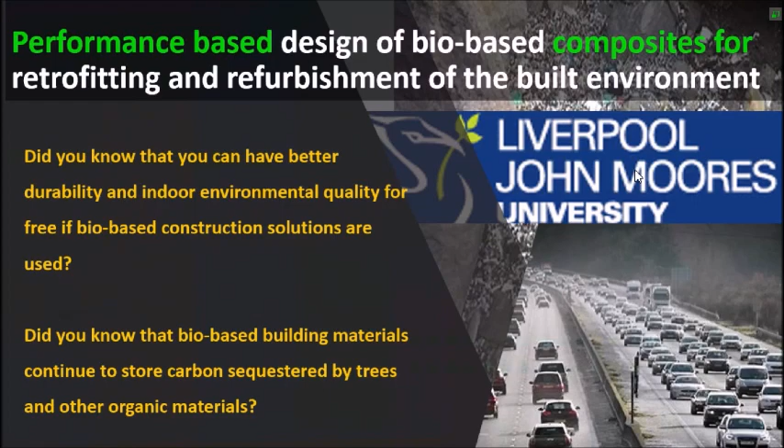Did you know that you can have better durability and indoor environmental quality for free if bio-based construction solutions are used? Did you know also that bio-based building materials continue to store carbon sequestered by trees and other organic materials? This is what we do at the Built Environment and Sustainable Technology Research Institute.

We develop and optimize bio-based solutions to increase buildings' energy efficiency and durability, and to optimize hygrothermal behavior using performance-based design methods, incorporating industrial byproducts, life cycle assessment, and life cycle cost.

We develop sensor technology for structural health monitoring, for new and existing construction solutions, and sensor optimization for human well-being. Finally, we test all these products in real-scale buildings to monitor behavior and optimize building materials.

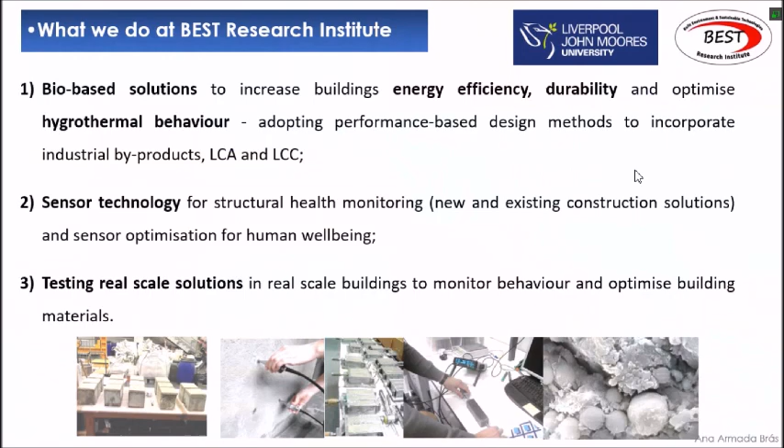Our team is bonded by a unique goal: to develop novel bio-based multifunctional systems that provide a solution for significant energy savings, structural durability, as well as indoor well-being and comfort.

We design bio-based materials by tackling moisture buffering while ensuring the right chemical and mechanical properties to produce smart behavior that in the future will feed into the building management system.

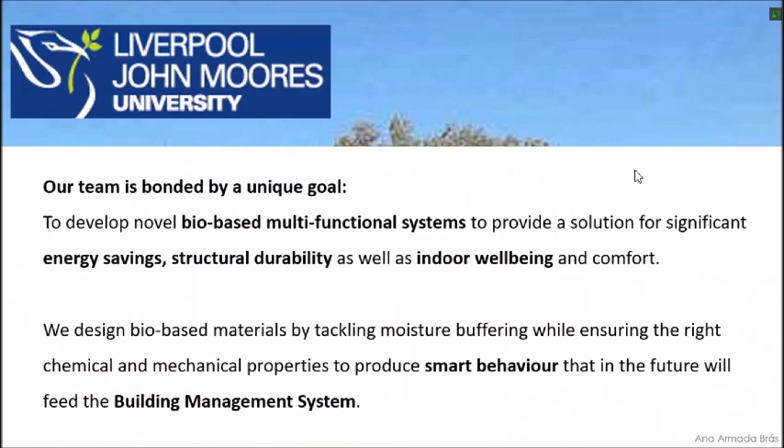These are some examples of the products we develop at our labs: internal thermal insulation composite systems, earth-based bioproducts, cork-based bioproducts, and self-healing bioconcretes.

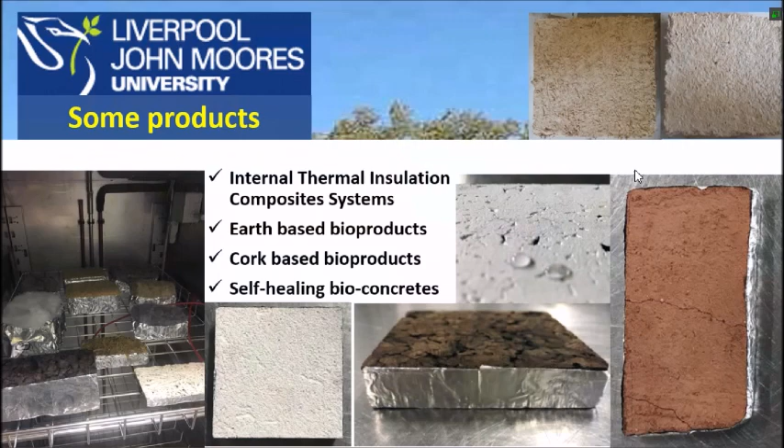We develop these at a laboratory scale, and then, of course, we need to test those new materials at a full scale to understand what is the real behavior.

Fortunately, we have 3 full-scale eco-houses on our campus, designed to standards from the 1920s, from the 1970s, and present day, fully equipped so that you can monitor using sensor technology, not only to check the behavior of those materials, but also different indoor environmental conditions.

We use this to test and develop new green technologies and new building methods, which is very suitable for industry, because if industry wants to develop a new product, they always want to test its real performance. This is why we always work together and develop industry collaborations, because we have the opportunity to carry out real-scale tests.

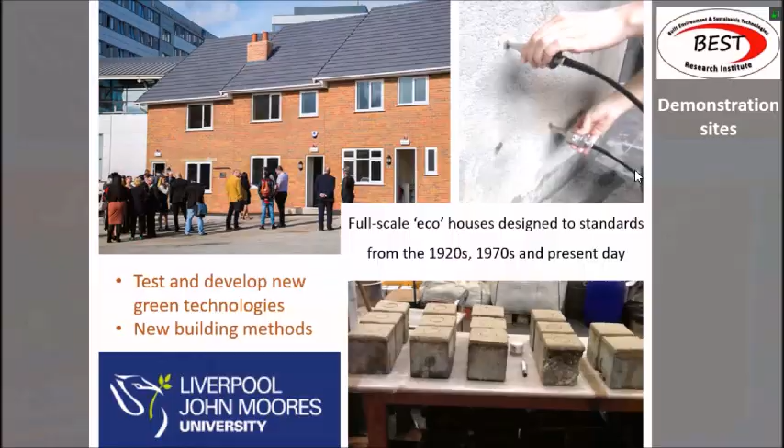These are some ongoing research projects at Liverpool John Moores University: optimization of bio-based building materials using image analysis methods, and indoor air quality regulation through the usage of eco-efficient mortars, a project in partnership with Nova University of Lisbon in Portugal.

This second project is about the development of bio-based materials that can be used as a refurbishment solution applied indoors, so it can absorb the excess of volatile organic compounds.

The third one is optimization of bio-based materials using real-time monitoring of moisture buffering behavior, and biocrete, a self-healing bioconcrete with protection of reinforcement against corrosion. Finally, development of novel multifunctional bio-based insulation systems with smart materials for building refurbishment.

So what we are doing, we are also developing bio-based solutions that can have the ability to absorb the excess of moisture indoor. I know that you don't have this problem here, but in Europe, it is very often during the winter that we have in our houses more or less 80% relative humidity, which is a higher level.

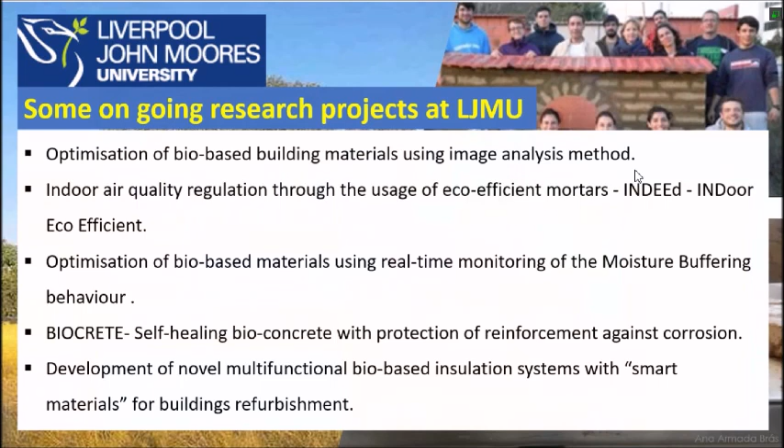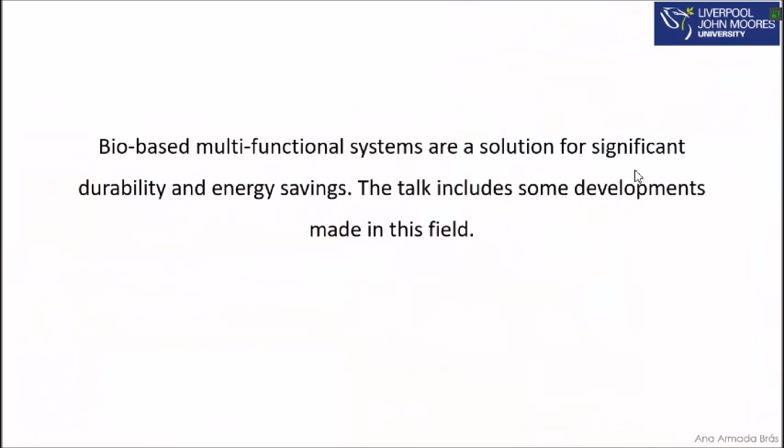So bio-based multifunctional systems are a solution for significant durability and energy savings, and the talk includes some developments made in this field.

Did you know that in Europe, repair and maintenance of existing structures cost around 40 to 60% of the construction budget, where reinforced concrete represents a major relevance? Only in the UK, 550 million pounds are spent per year on maintenance and repair of concrete infrastructure. So this is a major issue.

Steel reinforcement corrosion affects the service life of reinforced concrete structures, which means the economic impact could be reduced by better evaluation of the life cycle of concrete structures and using durable concrete materials. Here I would like to emphasize the importance of developing low embodied carbon and low embodied energy concretes.

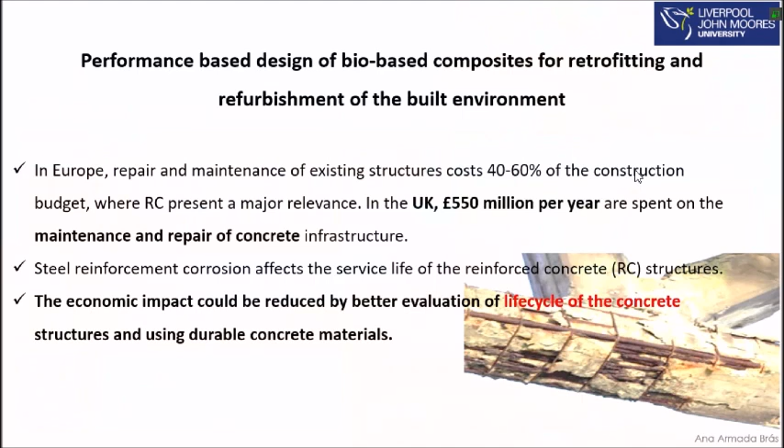Performance criteria makes it possible to specify desired functions of the structure and building construction solutions, mainly used for durability issues and energy efficiency purposes. However, the use of performance-based design always needs reliable information regarding the data of the involved materials.

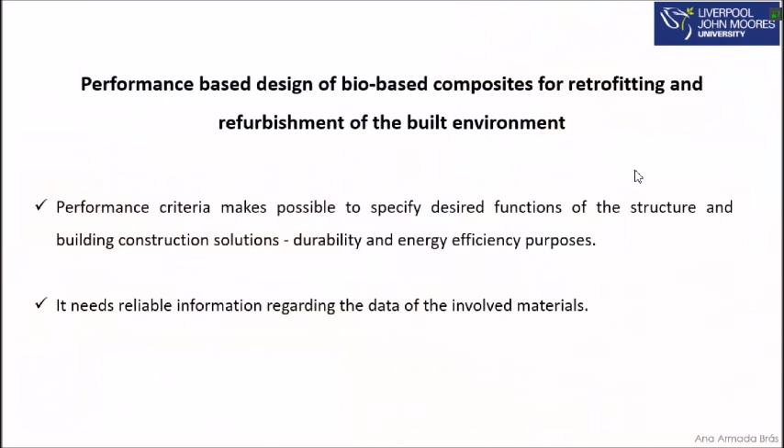So the first case study that I will present is the rehabilitation and replacement of a quay structure, where the owner wanted to preserve, replace, or repair all the structural elements due to a severe corrosion problem. A massive refurbishment and rehabilitation activity occurred 20 years ago, and after 20 years, all the concrete was corroded, which was a major issue in terms of service life.

So my team and I did a service life analysis of those reinforced concrete structures, taking into account the use of 2 different corrosion inhibitors and 3 different concrete types. We tested 3 concrete compositions with 2 corrosion inhibitors to check the service life, and then we could select the best option to repair the structure. Our objective was to select the best solution to improve the concrete service life.

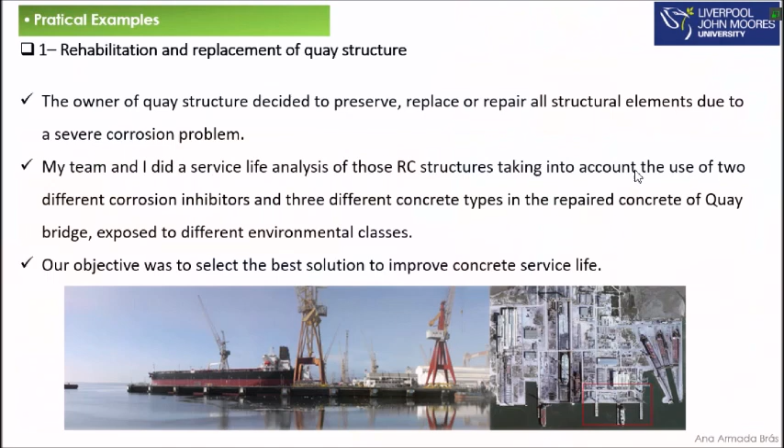Performance-based design was used in this situation. Your question should be, okay, what about design rules? We all know the standards, we know the rules, but the problem is that design rules are in general presented as deem-to-satisfy rules. So they don't give direct insight into the service life, the necessary maintenance, or the probability of premature failure. So you need to use performance-based approaches to solve this problem.

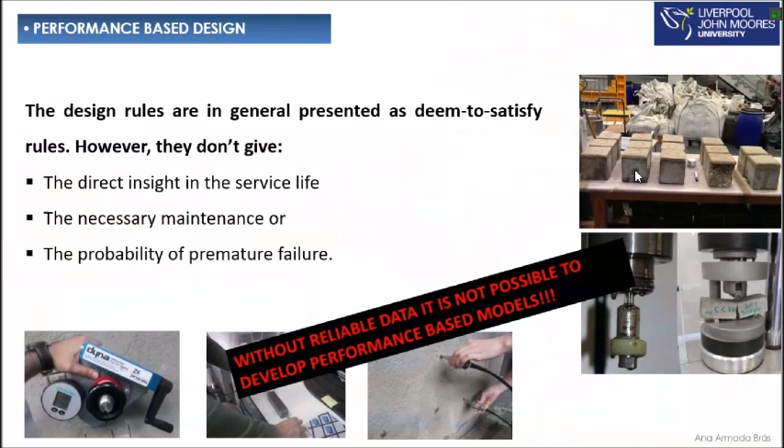So what are the performance criteria that we can consider for the built environment? It includes the ability of a construction solution or structure to operate without any maintenance, have a non-deteriorated appearance at all times, or even minimize energy consumption in buildings, or minimize hygrothermal risks, for example.

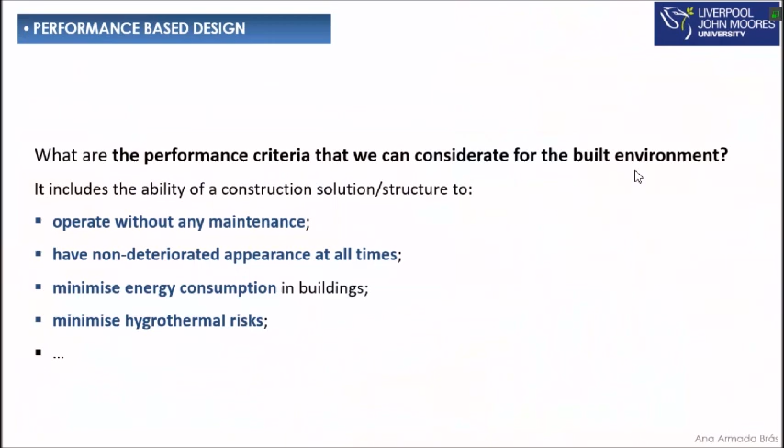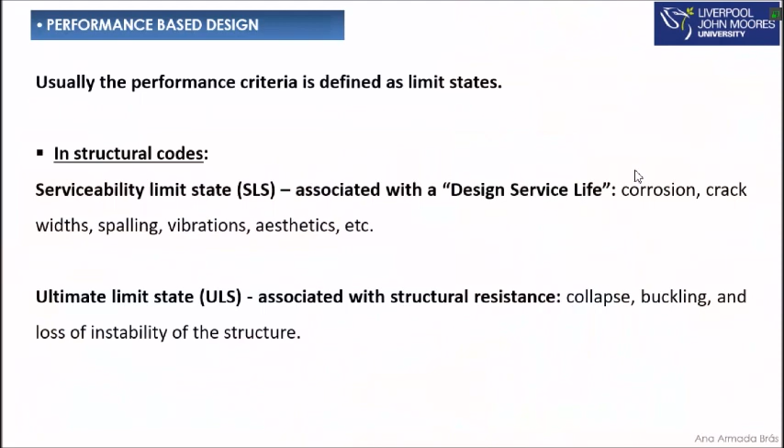So usually the performance criteria is defined as a limit state. In structural codes, we have the serviceability limit state associated with the design service life — corrosion, crack widths, spalling, vibration, aesthetics, etc. From an ultimate limit state perspective, associated with structural resistance, we should consider collapse, buckling, and loss of stability of the structure, for example.

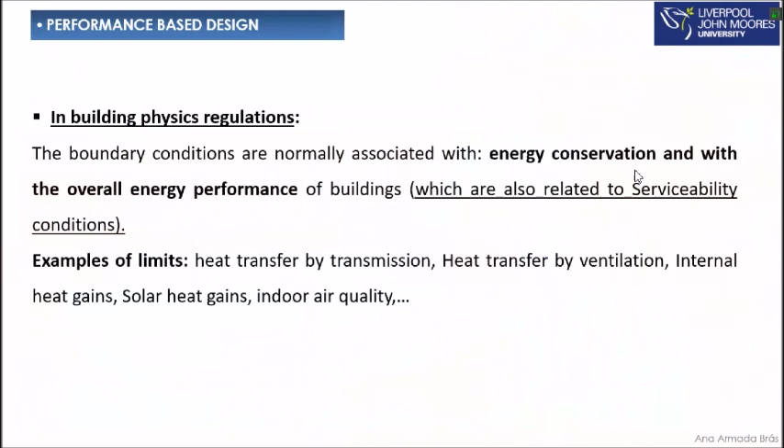That's from a structural perspective. From a building physics regulation perspective, the boundary conditions are normally associated with energy conservation and the overall energy performance of buildings, which are also a kind of serviceability condition. So these are some examples of limits: heat transfer by transmission, heat transfer by ventilation, internal heat gains, solar heat gains, indoor air quality. All of these you already know, of course.

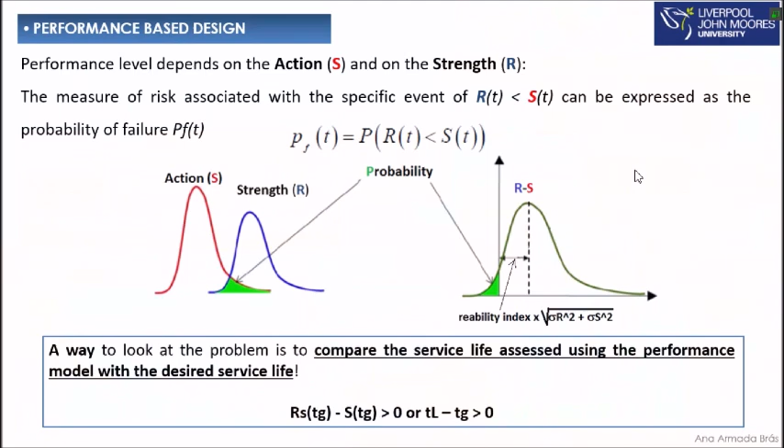Performance levels depend on the action and on the strength. So the measure of risk associated with the specific event of the strength being lower than the action can be expressed as the probability of failure. A good way to look at the problem is to compare the service life of a specific construction solution using the performance model with the desired service life.

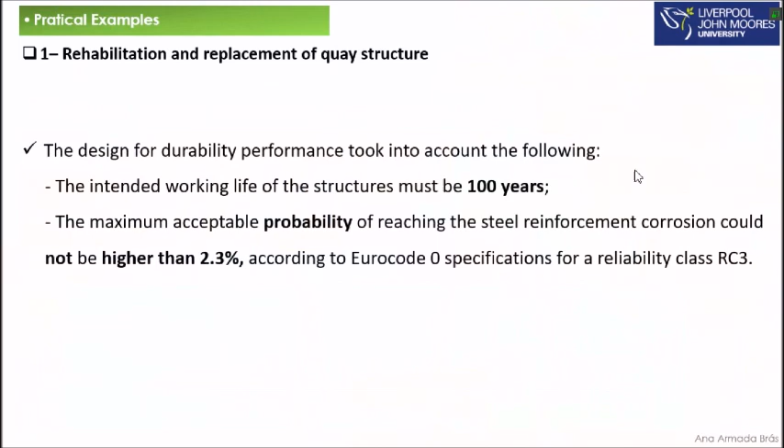Back again to the case study. This is a key structure, and of course we wanted to design the repair activities to ensure the structure presents a target of 100 years — that's the working life we expect. From European regulations, we know that the maximum acceptable probability of reaching steel reinforcement corrosion could not be higher than 2.3%. So assuming 100 years and that the probability of failure cannot be higher than 2.3%,

we did several modeling tests of the concrete elements of the structure, exposed to different environmental classes. Carbonation and chlorides are important for us.

For you, maybe sulfates also. And then three scenarios were defined for each concrete composition: we tested plain concrete, concrete with added admixture inhibitor, and concrete with surface applied migration inhibitor.

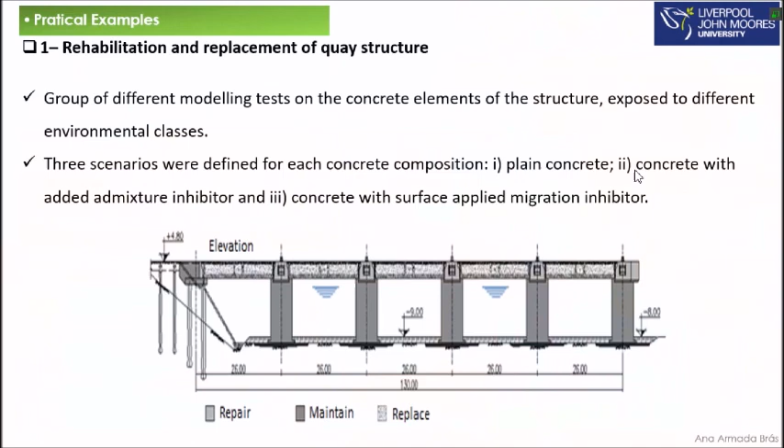At the lab we got the physical and mechanical characteristics of three different types of concrete, and these are the results at 28 days. We tested concrete with cement type 1, cement type 2, which includes 8% of silica fume, and cement type 4, including 40% of fly ash.

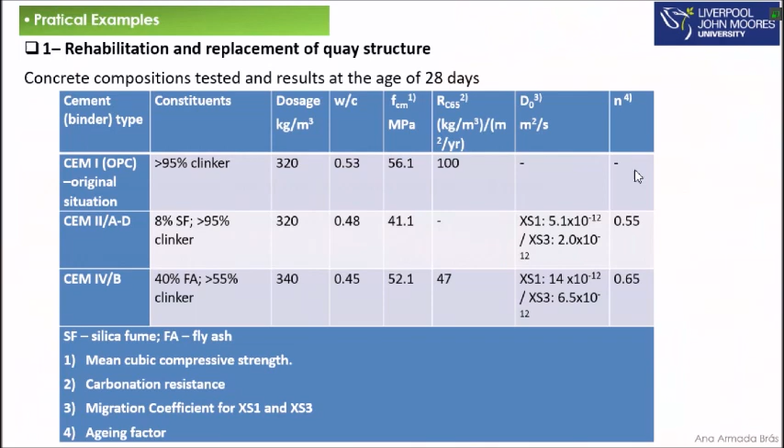In this previous situation, the principal degradation mechanism of the structure was steel reinforcement corrosion. So what is the action and what is the resistance here? The action is what promotes the corrosion - it's the CO2 and the chlorides. What can resist against this corrosion? The cover of the concrete, and the chemical and physical characteristics of the concrete.

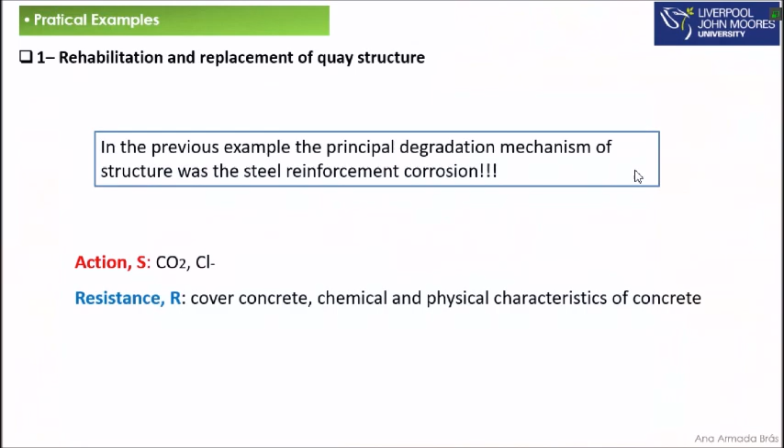So we use the Tuutti model of reinforced concrete deterioration under the environmental action of carbonation, Xc, and chlorides, Xs. The Tuutti model includes the prediction of the initiation time and the propagation time associated with the process. The initiation period is mainly dependent on chloride and CO2 penetration into the concrete cover, which creates the steel depassivation condition.

As long as we get the steel rebar depassivation, we start the period of propagation. This period is initiated with the depassivation and ends when a certain durability limit state is reached, producing reinforcement corrosion. We can increase or decrease the propagation period by exposing the concrete more or less to oxygen, moisture, and different ranges of temperature.

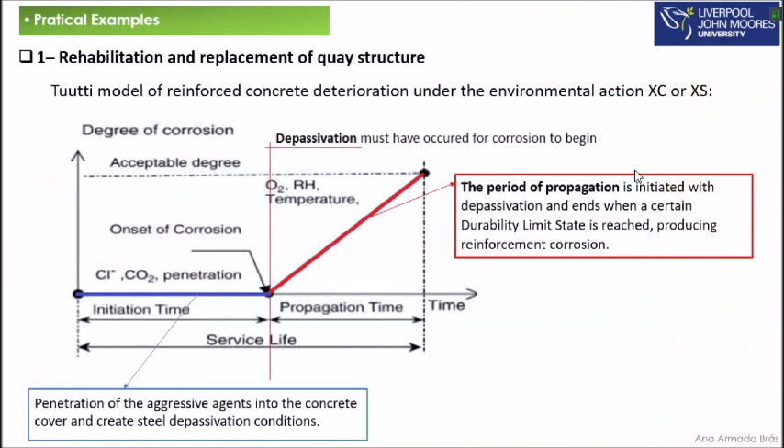So what is the role of corrosion inhibitors? Considering carbonation environments, the variable that is changed by the presence of corrosion inhibitors is the corrosion velocity, which tends to decrease. In chloride environments, corrosion inhibitors can change the chloride thresholds, which is important to increase the initiation period, and they can also reduce the corrosion velocity, which affects the propagation period as well.

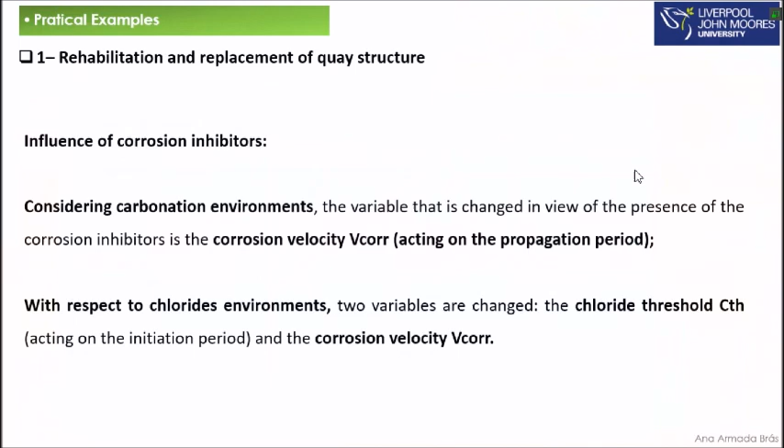So two types of corrosion inhibitors from a company were analyzed: added as an admixture to fresh concrete, which I'll call AACI, only possible to use by replacing contaminated concrete mass. We compared that performance with a surface applied migrating corrosion inhibitor, which I call MCI.

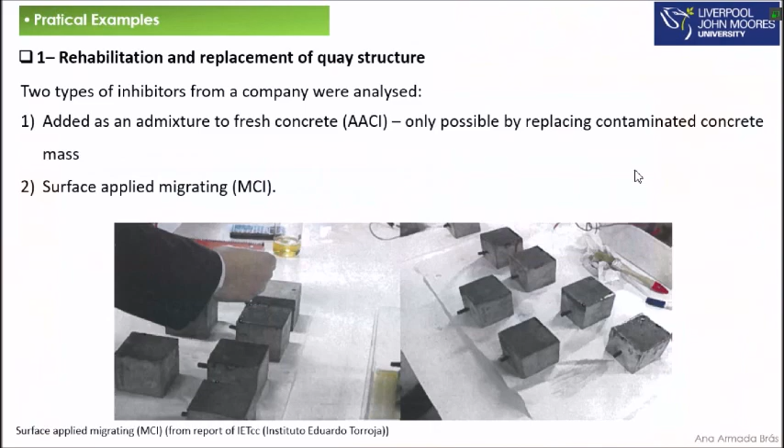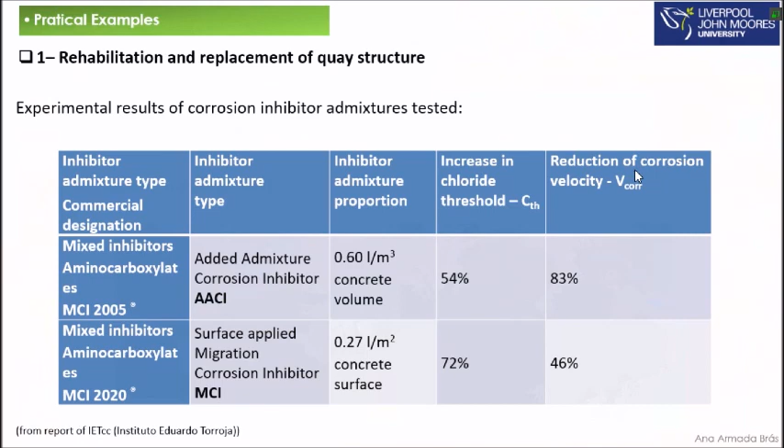These are the experimental results of corrosion inhibitor admixtures tested. As you can see, it is expected an increase in chloride threshold of up to 54% for AACI and up to 72% for MCI, and a decrease of the corrosion velocity of 83% using AACI and 46% for MCI.

The present study focused on the most aggressive exposure environment. Do you also use this equivalent class? You probably have a similar way of classifying structures in your Indian codes. XS1 is the deck of a bridge, for example - areas exposed to airborne salt but not in direct contact with seawater. What we call XS3 is tidal splash and spray zones, like these columns here that receive the waves, and XS2 is below, underwater.

Of course we didn't test underwater, because that's the best solution - the best condition in terms of corrosion minimization. So if you minimize the corrosion for XS1 and XS3, that's fine.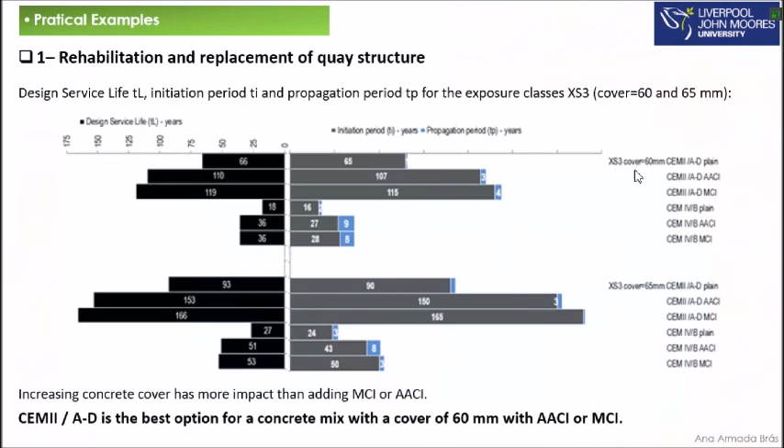So what about the balance between embodied carbon and service life of concrete? What do we know about embodied carbon of construction materials? First, each maintenance intervention is characterized by its longevity and embodied carbon. Second, repairs with low life expectancy have a high carbon impact. Then, the cumulative effect of these maintenance actions increases the total embodied carbon expended, which leads to not obtaining the required longevity.

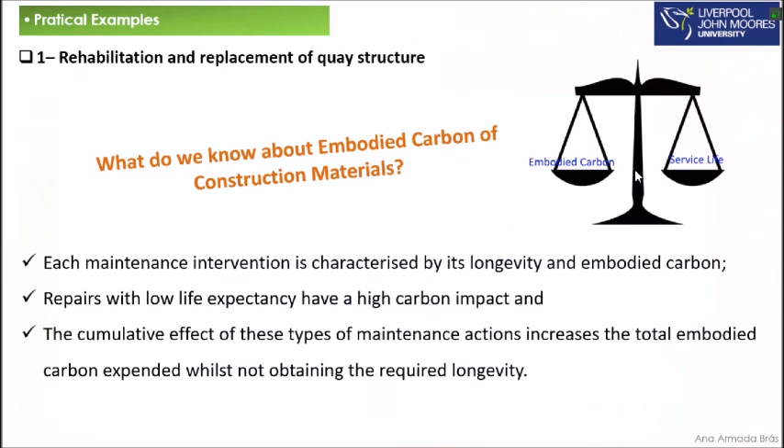And I tried to write in Hindi. I hope you understand, I was trying to write 'did you know?' I hope it is correct.

So why is it important to reduce the embodied carbon of construction materials? Because it reduces resources and associated costs, but also alleviates longer-term risks around resource availability. And sometimes resource availability is also an issue in your country.

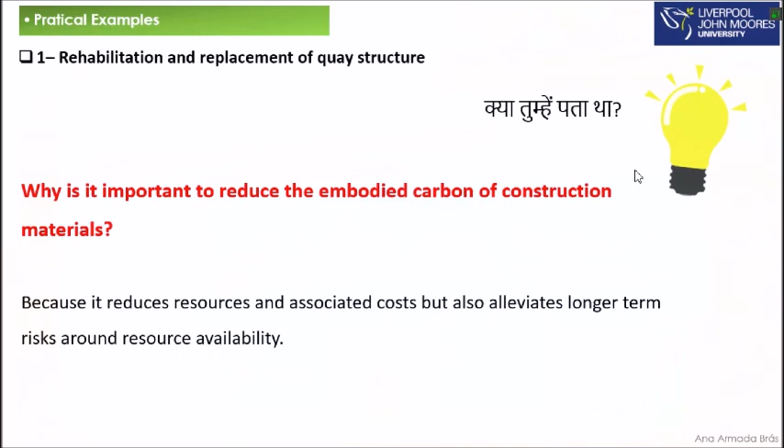So we compared the performance in terms of service life of the concrete compositions. I show as an example one graphic here, comparing the concrete design service life with the embodied carbon expended in kilograms of CO2 equivalent per ton of concrete produced. The design service life are the blue bars you can see here, and the embodied carbon expenditure are the lines for each concrete composition used in each repair action. The graphic I show is for an exposure class: the tidal splash zone of the columns.

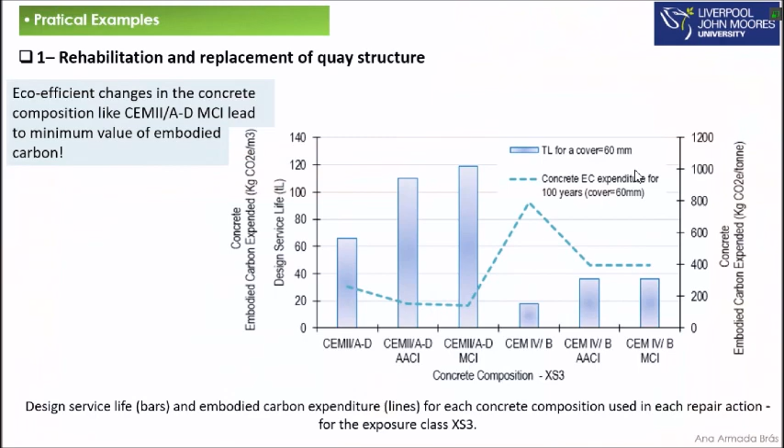We know that eco-efficient changes in the concrete composition, like cement 2, lead to a minimum value of embodied carbon. So what is the main conclusion? Eco-efficient changes in the concrete composition led to minimum embodied carbon and were associated with an increased service life. So it seems that development of biocomposites, in this case bioconcretes, are a possible solution for this problem.

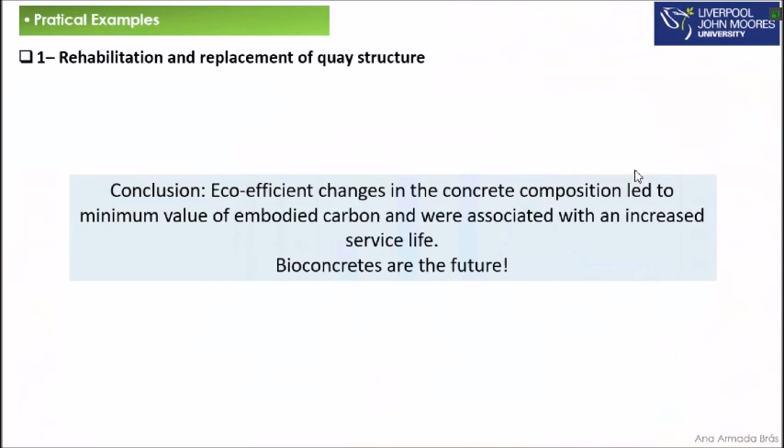From another perspective, I will present a case study where the issue was not structural, like the corrosion problem mentioned before. The issue here was the energy efficiency of buildings belonging to a social neighborhood. These are 28 apartment blocks from the 90s belonging to a social neighborhood, and retrofit works had to take place to repair existing defects and improve energy efficiency and indoor comfort of each building. So what was the challenge?

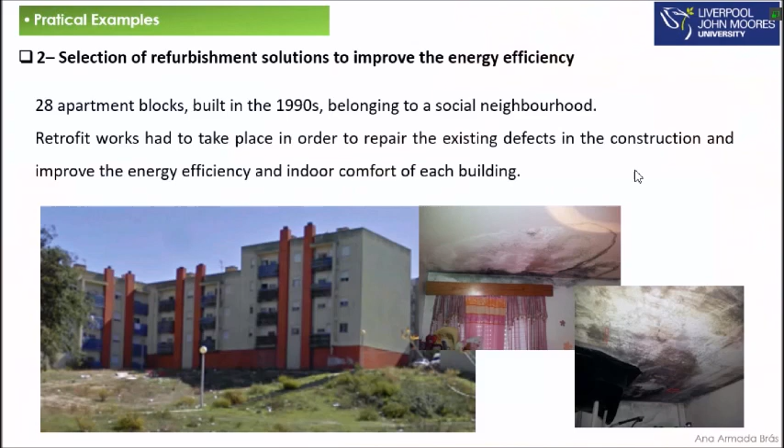We evaluated the hygrothermal risk of several refurbishment scenarios with and without bio-based solutions. We implemented a probabilistic approach, like a performance-based design again, for designing solutions for building thermal retrofitting. It was decided to design for a minimum indoor temperature of 18 degrees, based on the hygrothermal monitoring and energy audit we did over 2 years for these buildings.

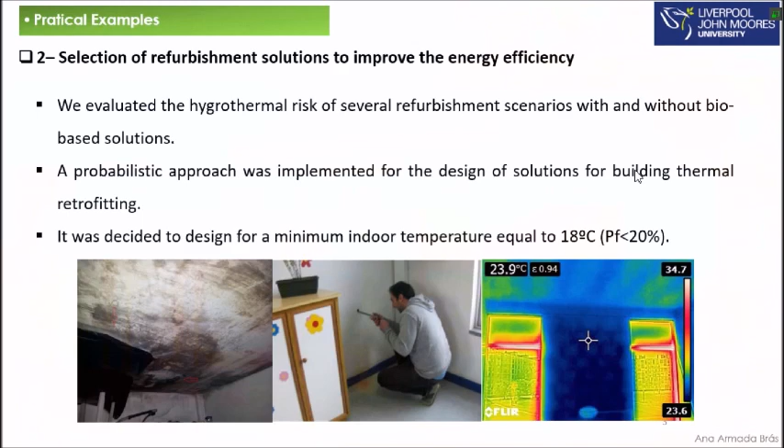We realized that to ensure relative humidity was always lower than 70%, for health reasons so there were no health problems for people, it corresponds to a probability of failure of 20%, which leads to an optimum minimum design temperature of 18 degrees. This is because in the majority of these houses, the indoor temperature was around 14 degrees, so it was very difficult to survive here during winter.

So the development of innovative bio-based materials for thermal retrofitting enabled an increase in thermal insulation of up to 40%. What did we test? We did laboratory tests using different bio-based materials, namely a very famous one in Europe, which is cork. I know we don't have cork here, I think.

Cork is in fact mainly, 50% of cork comes from Portugal, is exported from Portugal, and it comes from the trees. We incorporated cork granulates into new mortar compositions and compared them with traditional solutions. We realized that thermal insulation could increase up to 40%.

We realized there was a reduction of CO2 emissions and embodied energy up to 30%. We also realized that these types of solutions could minimize the impact of retrofitting solutions to a service life of less than 30 years, which highlights the importance of durability in the analysis of energy efficiency in buildings.

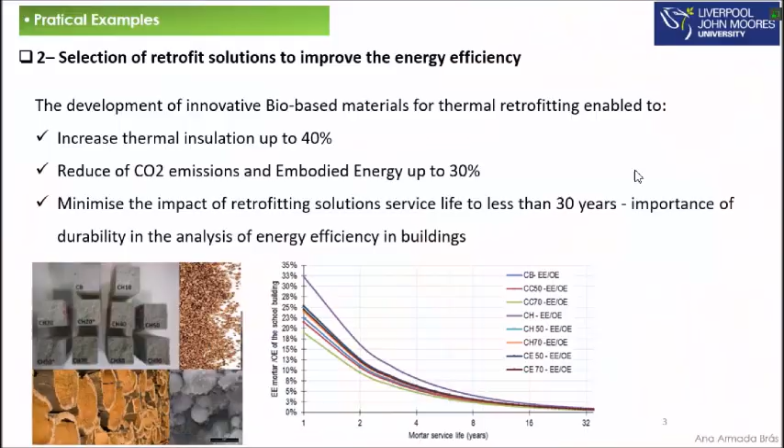Following these two examples, from the durability perspective and from the energy perspective, this is what we have been doing at our labs: designing bio-based composites for retrofitting and refurbishment. Of course we realized that the use and need of using biotechnology concepts was crucial to increase performance towards better durability and better energy efficiency.

So basically, this is what we are doing: trying to promote energy efficiency with smart materials, mainly in buildings, but also tackling the problem of durability of structures, because the impact of that industry is really high.